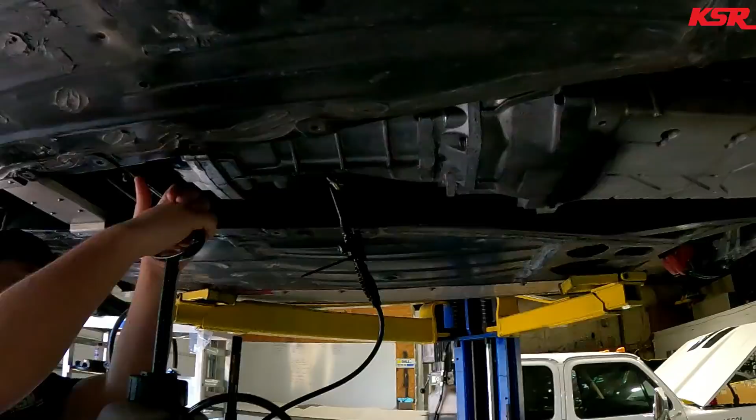CJ's putting transmission fluid in the Viper, which if you guys haven't ever seen that trick before, that's just a garden sprayer. Fill it up full of whatever fluid you need, and you can put fluid in hard to reach areas without having to put the bottle in. Sometimes it makes a little bit of a mess, especially if you walk away from it and forget that it's going in, because we put a little zip tie on the handle to hold it on.

Oh yeah, speaking of that, there's a mess right there. Yeah, just like that. I meant to do that. See, we're just showing you guys an example of what can happen.

But anyways, yep, Dick's backing in with the lawn dart, and we're gonna make some horsepower.

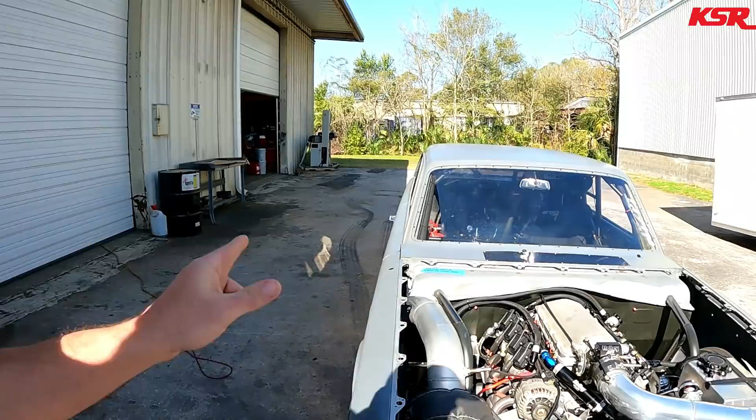All right, for those of you that haven't seen the lawn dart, this is the lawn dart. Car we built a while back. Dick and his sons have been running it, and if you go to YouTube, Dick also has a channel. It's just Dick Deason, 2 separate words. He's got all kinds of videos on the lawn dart on his channel.

Yeah, he's been putting this thing through its paces. It is a stock block 5.3 combination, and it's fast. It's a no-time car, so I'm not gonna tell you what it runs, and we're shooting for a solid 600 horsepower today. Yep. But we're gonna put this thing on the dyno and do a little bit of work.

All right, well, we are loaded up on the dyno, and it's been a while since I've been in this car, but I forgot just how freaking cool this thing is. It's a 63 Dart. If you didn't know the story behind the car, Dick actually took his learner's test for the driver's license in this car. It's been in his family since like the mid-60s, and now it's a full-on race car. It's been an awesome project to be a part of.

I mean, yeah, I'm proud of the stuff we do, but this car is super cool. Just underneath it, it's 25.3 on the roll cage, so chassis legal for 650 at 3,600 pounds. The car's not that fast.

Yeah, it's not that fast. Nope. So anyways, I gotta get to work doing some tuning. We're gonna try and figure out these injectors, but anyways, we'll get to work, do a little bit of driving, tuning, and then I'll be back when we start making some actual pulls for some boost numbers. So, let me get to work, and I'll see you in a second.

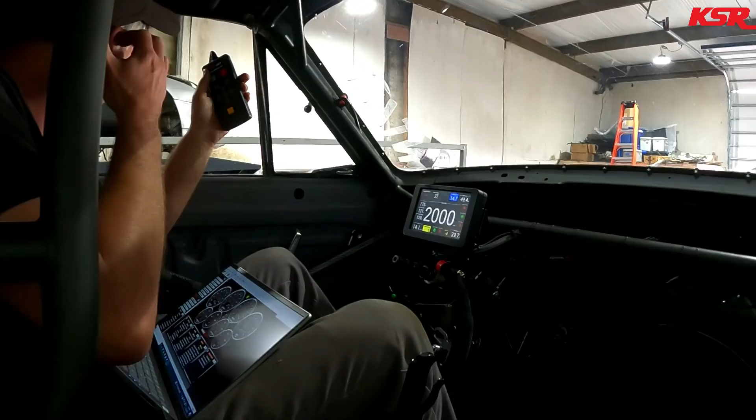So, let's make a pull. 5 PSI dome pressure. Let's see what it makes. See how close we get to that 600 horsepower. It was definitely rich coming up.

Alright, so attempt number 2. First run, we actually got into a traction control table that I forgot to turn off. Basically above about 80 miles an hour, Dick had a traction control engineered into the table that if the rear exceeded the front by 5 miles an hour, it pulled a bunch of timing out of it. The thought was to try and save it on a gear change. Sometimes cars will spin on the gear change. So it was in that table because the front tires aren't spinning and the rear tires are.

So this time it's not going to pull that 15 degrees of timing out. It actually made 500 horsepower that last time on like 10 pounds of boost. But it pulled all the timing out right after it made the peak horsepower. So this run should be a little bit happier, should make a little more power. We'll see. That sounded a little better.

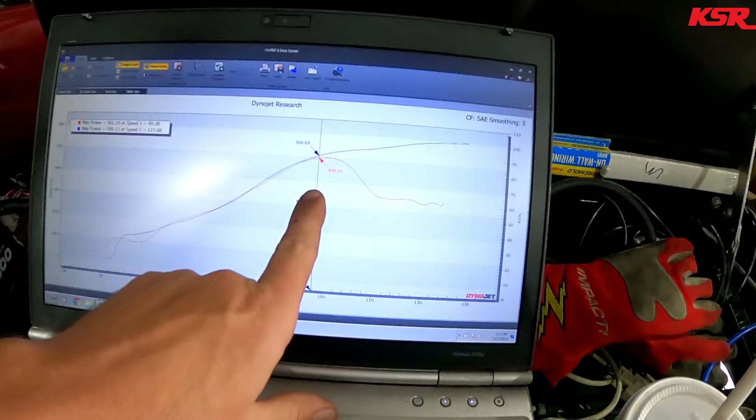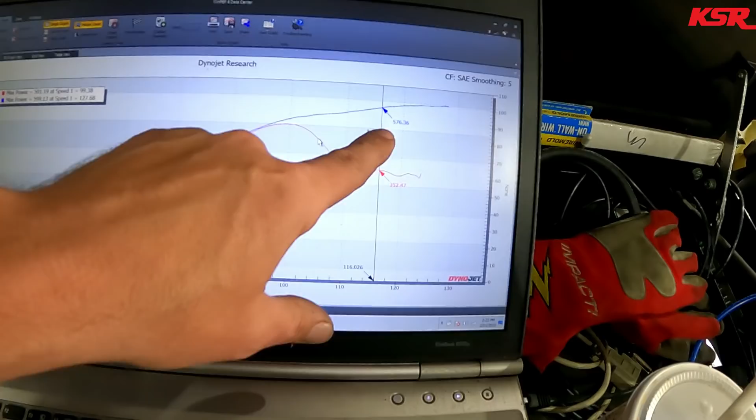Alright, so basically those two pulls are effectively the same tune, with the exception of the timing reduction for the traction control. And you can see the screen, same boost, caps out at like 11, 12 PSI, but the traction control takes over and pulls a bunch of timing out, makes like 350 horsepower, 352, or 576 with the timing back in it. So just timing has made the difference between 352 and 576, so 220 horsepower.

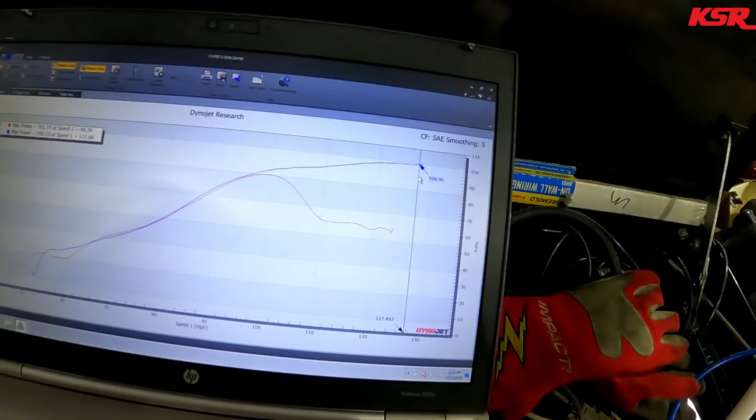And then already we've basically hit our 600, 599. So we're good, we're done. We hit our 600 on only 11.6 pounds of boost, I believe it was in the computer. Well, let's turn her up a little bit now. Let's see what we can do to dial this thing in even more. Well, we're already at 600, so we're doing good.

Well, this thing is all kinds of in my face. I don't know if this camera angle is going to work or not. But, pull number 3, 10 pounds of dome pressure, should make 15-ish pounds of boost. And yeah, should make a little more power.

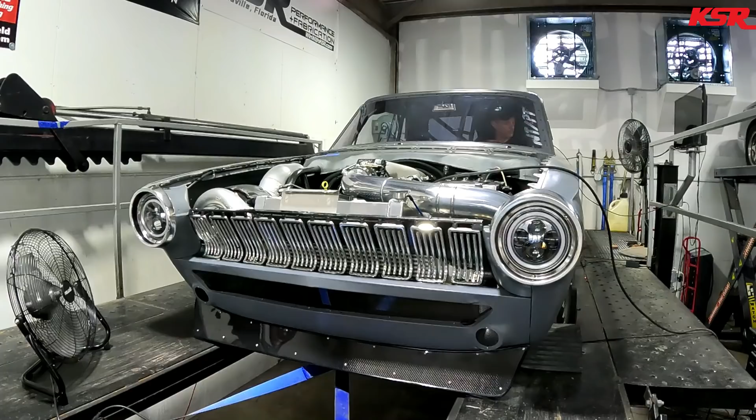Man, that thing was still going, wasn't it? Still climbing on power. All right, that was a nice clean pull. Look at some data and go look at the laptop for the dyno. Make another one here in a minute.

All right, so for this pull, well, that camera's close. We're gonna go ahead and get back up to where we normally run this thing at the track. Try to shoot for 25, 30 PSI and go ahead and turn it out to 8100. Yep, 8100, that's what I said. This thing turns that at the track and has, I think, right at 100 runs on the car since we put it together for Dick and the guys.

So that pull made 740 something, I think. Can't remember the exact numbers. But that was 17 pounds of boost at 7,300 and the power was still going up like crazy. So, like I said, we're gonna make this pull. This one should be pretty spicy.

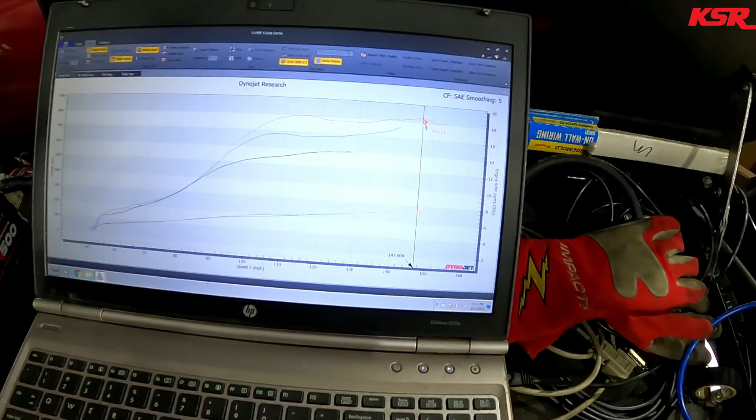Boost curve that time. She came up and kind of parked on about 800 to the wheels. Peak out here at 7,600, 825.5 horsepower at the tires. And that was, at that point, about 22 pounds of boost, 23 pounds of boost.

So what we're doing now is we are putting a fresh set of plugs in it, and we're going to do a check, like another pull just like that one. Maybe just another 2 or 3 PSI of dome pressure to try and make maybe 25, 27 pounds of boost for the whole curve.

I actually did a little bit of work on the target dome pressure by RPM to try and get up and make 25, 27 PSI for the whole time we're making boost. And we're gonna shut it off, read all the plugs, and decide on adding timing, see if we can see what it wants for timing at that boost level.

And then Dick will have that information when he goes to the track. If we can gain some power, he'll have that information to try and see what he wants to do. We'll see if we can get a trend in how the spark plugs are reading, or when he takes it to the track, he'll know, okay, well, if I add 1 degree here, I know just about how far the timing mark will move. Yes, it's different at the track because the pulls are longer, but at least some kind of data here should help him out when they go to the track.

But got a good handle on the injectors now. Now it's just down to the fine tuning. All right, well, let's see what we can do on this pull. Double check everything. Yep, that's got what I want there. Got our boost on.

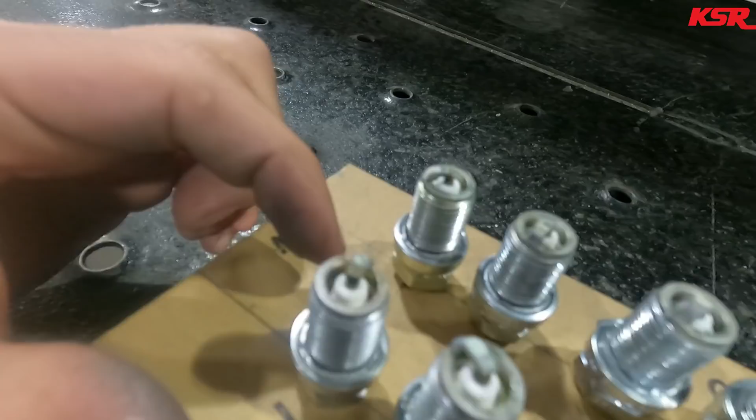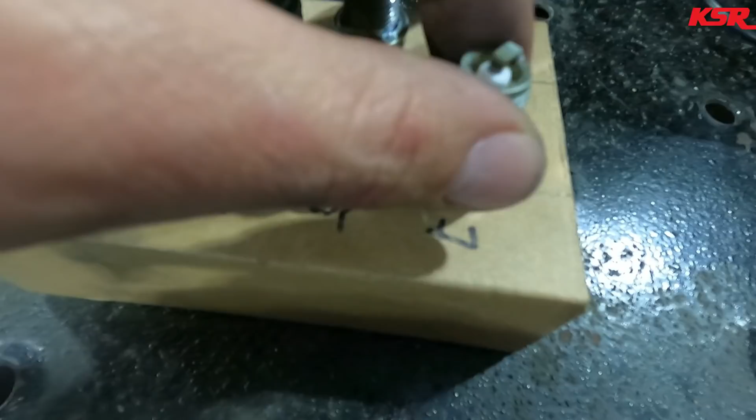All right, so I thought you guys might want to see kind of what I'm looking for, at least with spark plug stuff. Maybe this will show up, but basically you can kind of see the discoloration on the very tip of the plug, or the tip of the electrode. See, I'm just starting to get it there. Just starting to get a little bit of a mark there. That one's hotter than these two. Same with these over here.

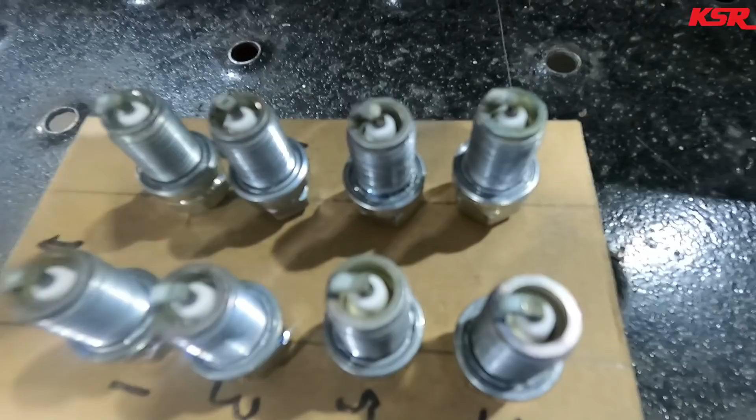So what we're gonna do now, typically the LS's, the corners run hotter, just for whatever reason. So I'm gonna go add 1/2 degree to these three. And I'm gonna add 0.7 or 0.6. I haven't completely decided yet, because this one you can still see the light all the way onto the tip. So that one definitely wants some more. So we'll do that here on the dyno.

And then once it leaves here, because the load is different on the racetrack, we'll pull 1.5 degrees or so out of the actual table. And then that should just get it back to being safe. Because the pulls are longer on the track, it'll put more heat in the spark plugs. But the individual cylinder balancing, from what I've seen, when we do that on the dyno, it still agrees with what the car wants at the racetrack.

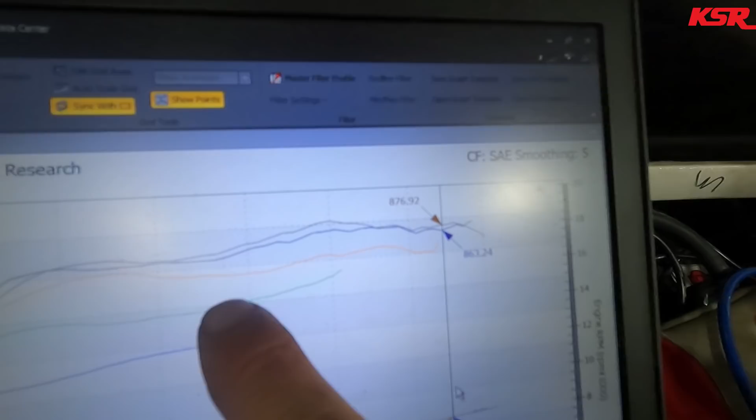So, put all these back in. Probably make one more pull, just to make sure we don't go backwards. Because where it didn't pick up power, I actually went back kind of in the middle. Because what you can see on our power here, it really didn't pick up much up top here, but it lowered the boost. So more power per pound of boost, but not necessarily

more overall power. So like I said, we made the same power, but at less boost. So it's all a balancing act of trying to figure out where these things want to be exactly. My preference is going to be to actually pull the timing back and run more boost, and still have the timing conservative. So get this thing all back together, one more pull, probably call it a day.

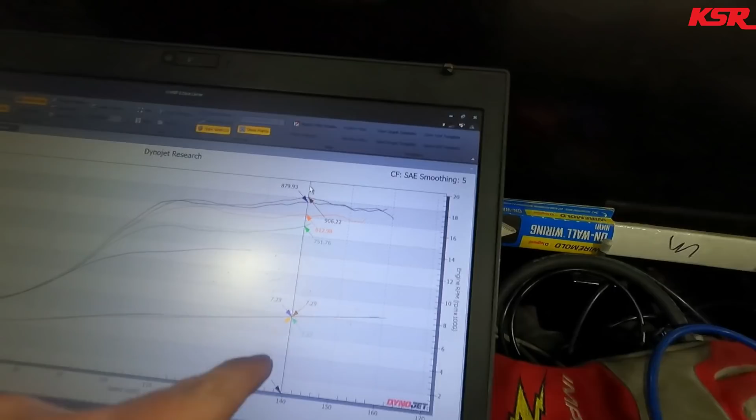But that last pull was a tickle over 900. It's 7,300. I think we're making, let's see, what are we making? We're making 27 pounds of boost right there. So let's make one more pull and see what happens. All right, well, one more pull.

Same boost, or at least same dome pressure. And we'll see what it does with the boost in relation to the timing. See if we gain any power, because we did increase the timing in those couple of cylinders. But really the power should be about the same, because I've taken timing a little bit out where it didn't help. So I took timing out there, but then increased it in the middle cylinders. So see what happens. That's what we have dynos for, right?

You tune, learn. This is a pretty good argument for it, at least when you're making a huge switch with your injectors, especially across different brands of injectors. Like when I change within the Holley brands, pretty much just plug the different injector data in, and it seems pretty close. Like if I'm going from an 80 to say a 160, click that button in the Holley, and everything still is pretty well close to what it was.

This is going from 160 to a 245, I think it was 245. But being that it's a different brand and different style injector when it comes to the solenoid that's operating it, that makes a pretty big difference. So interesting things like that make it worth getting back on a dyno. Yeah, you can just kind of chuck it in there and wing it, but what we were finding out is it needed a substantial reduction in the base fuel table, like 25%, because even with the Holley adjusting for the larger injectors, they were still acting even larger than what they were on paper. Anyways, let's dyno.